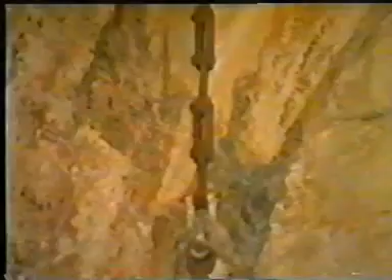In a discontinuous way, this was achieved by using metal balls. By rolling a counterweight along a curved track, continuous control was obtained.

In spite of these improvements, this development proved to be a dead end. More viable was the use of balance beams. This led to the bascule bridge with a counterweight in the balance frame.

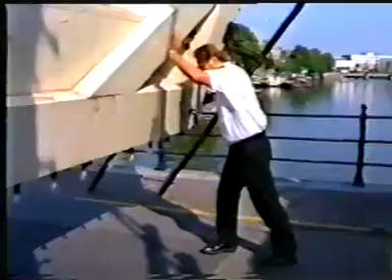Until about 1800, these bridges were constructed of timber. Afterwards, this material was steadily replaced by wrought iron and later by steel. Now, equilibrium can be maintained in each position, thus requiring a minimum of energy to move the bridge.

Integration of the balance frame in the deck gave birth to the bascule bridge. The ultimate situation is the same structure without counterweight.

A combination of a fixed and a movable bridge is the transporter bridge, very popular around the year 1900, but now out of date.

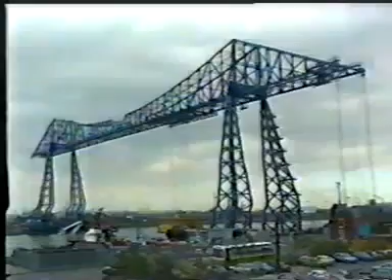Passengers and motor cars are transported by means of a carriage or gondola. Remotely related to this type of bridge is the rolling bridge.

This entire railway bridge is moved by means of rollers and cables.

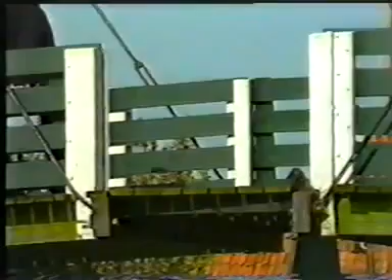In this cantilever drawbridge, not only the width of the vessel is important, but also the mast.

An old type of movable bridge is the derrick bridge, applied in fortifications and railway bridges. The main girders rotate with respect to vertical axes, placed in a saving in the abutment. This arrangement makes the opened bridge look like it's folded up.

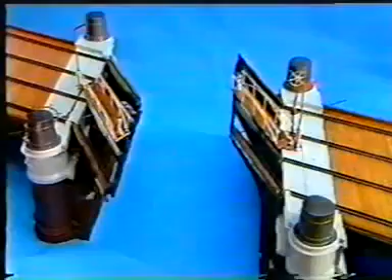A floating bridge is an alternative to make a passage. Here, pontoons fulfill the function of the bridge and support the deck. A system of cables pulls the pontoons under the approach spans to let the ships go through.

A next step in the direction of a swing bridge is this pontoon bridge.

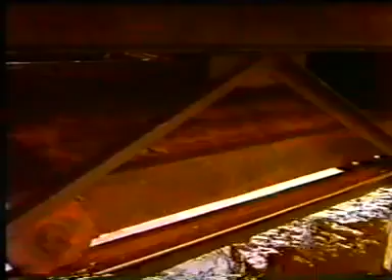A rigid bridge construction, supported by a submerged pontoon at the nose of the bridge, leads to the pontoon swing bridge. At the lower flange, a bogie, including counterweight, is moved in the direction of the point of rotation. The nose of the bridge is lifted from the supports.

The entirely submerged pontoon generates a constant upward pressure.

Another application of a pontoon can be found in a swing bridge with a rim bearing. The pressure on the rollers, due to dead load, is reduced to about 30% by a pontoon in the pier. In this way, friction is reduced, and consequently the energy necessary to move the bridge.

At the turn of this century, this system was used in some large swing bridges in England. To move the bridge, it has to be freed from the supports.

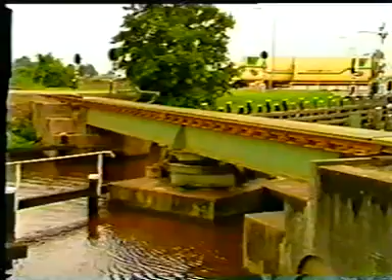A combination of drive and raising device is the tulp construction, an ingenious invention named after its designer. A pinion rotates a circular carriage by means of a toothed rack. The upper wheels pass along a coil-shaped track and lift the bridge and set it free from the supports.

The bridge does not yet rotate, as one roller of the crank prevents this movement. The moment the bridge is lifted sufficiently, the crank rotates.

The lower roller now follows the horizontal track. The other roller is supported by an inclined plane, which prevents the bridge from rolling back along the slope.

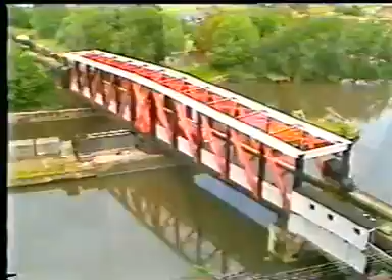In a symmetrical swing bridge, equilibrium is established naturally. However, this symmetry is a necessity in this aqueduct swing bridge. Symmetry, because changing water level and the possibility of leaks must also be taken into account.

To move this railway bridge, first a number of safety procedures are carried out. With a key system requiring a mandatory sequence, disconnection of the bridge from the signal system and rails is achieved.

In these two unusual asymmetric swing bridges, two counterweights keep the bridge in equilibrium. One counterweight in the lateral direction, the other in the longitudinal direction.

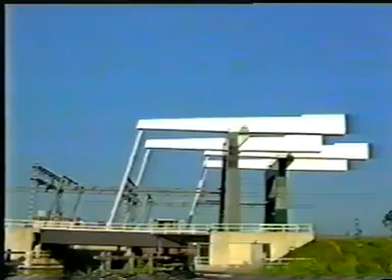Most types of movable bridges did not adequately meet developing requirements and have ceased to be used. Four types survived: the bascule bridge with overhead counterweight, the bascule bridge, the lift bridge, and the swing bridge. Movable bridges are constructed of steel and applied everywhere.

A bascule bridge with overhead counterweight. The structure consists of the movable deck, the tie rods, and the balance frame, including the counterweight.

The balance frame is supported, in this case, by a portal frame. In this railway bridge, the bracing between the balance beams is missing. Here, the balance frame is composed of two I-beams, including a bracing designed as a Vierendeel girder. This bracing is required to produce lateral stiffness against the wind and to prevent the lower flange from buckling.

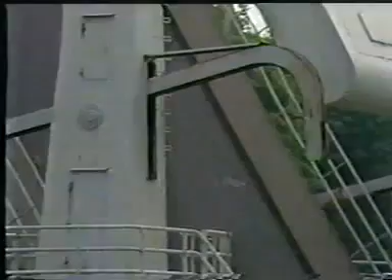A part of the operating mechanism is housed in the columns. It moves the curved rack, thus opening and closing the bridge.

In small bridges, the complete operating mechanism is housed in the columns. An electric motor drives the bridge via a gearbox, a system of shafts, and an open gear. In larger bridges, the drive is housed in a pit in which the motor, gearbox, and brake are placed.

In order to guarantee equilibrium in every position, it is necessary to locate the pin connections in the balance frame and the deck at the vertices of a parallelogram. As a second condition, the virtual lines between points B and E and C and F should be parallel. Here, E is the center of gravity of the whole balance frame, and F is the center of gravity of the deck.

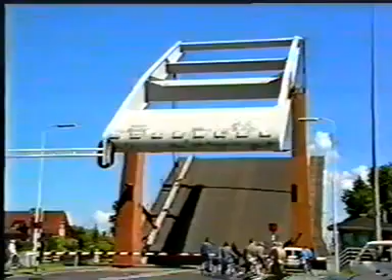In this case, the frame moves in between the columns. The point of rotation is situated immediately adjacent to the column. However, the point of rotation may also be situated above the column. This would limit the angle of opening of the bridge severely. For this reason, an offset column is used.

In bridges with an orthotropic deck, separate balance beams are used, and the bracing is missing. By separation of the balance beams, more counterweight can be installed. The beams are constructed like box girders. A box girder section possesses a large torsion constant and bending stiffness in two directions, making the structure less sensitive to vibrations.

Equilibrating the deck takes place by means of the counterweight. It may consist of concrete, a mixture of scrap and concrete, or cast iron, usually put up in a box. Or, in the case of a broad bridge, a solid block of cast iron at the back of the beam.

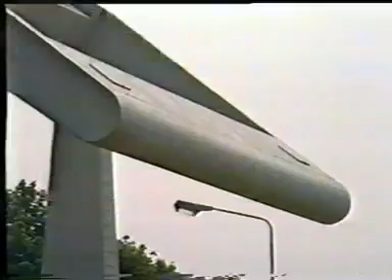In bridges with a timber deck, the counterweight is placed in a box girder. In this way, a rigid connection is created between the beams, ensuring that the bridge rises evenly. A one-sided drive becomes possible.

Correction of the counterweight may be necessary due to structural modifications made to the deck. Additional space for ballast blocks in the counterweight box is reserved and is accessible by hatches.

The tie rods connect the balance beams with the deck. Thus, vibrations caused by traffic load are transmitted to the balance frame. This is taken into account in the design of highway bridges. These vibrations can be reduced considerably by connecting the tie rods to the front cross girder at the level of the neutral axis of the main girder.

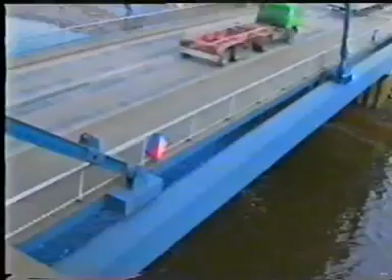Alternatively, the tie rod is connected to a lift beam adjacent to the deck, which is connected to the front and back cross girder by means of a hinge-like construction.

The deck of a modern bascule bridge with overhead counterweight is usually designed as an orthotropic deck. It is composed of a deck plate, stiffeners, and cross girders. A thin wearing surface is applied to the deck plate in order to reduce the dead load. This layer usually consists of a slurry covered with a layer of calcined bauxite, with a total thickness of about 8 millimeters.

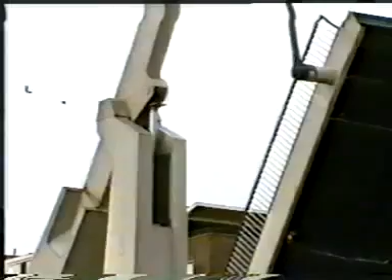Operation of the bridge is possible by means of a crank connecting rod mechanism, a hydraulic system, or by means of a rack: a steel bar passing through or along the side of the column. It is provided with teeth or pins and meshed with a pinion. The mesh is maintained by a guide frame.

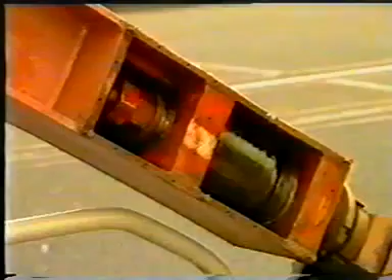The reaction at the front cross girder, due to dead load of the deck, is reduced to zero by the tie rods. To create a positive reaction on the supports, the rack contains a pre-stressed buffer. This buffer is compressed by making the pinion rotate a bit further, and the resulting compression is retained by the brake.

Given a constant speed of rotation of the pinion, the movement of the deck is decelerated in the neighborhood of the support due to the curvature of the rack. In the same way, the compression of the pre-stressed buffer is achieved.

As a consequence of developments in electronics, the speed of the pinion is adjustable and a straight rack can do the job. By using a motor with electronic speed control, a prescribed velocity time diagram can be followed exactly: brake loose, creep, accelerate, constant velocity.

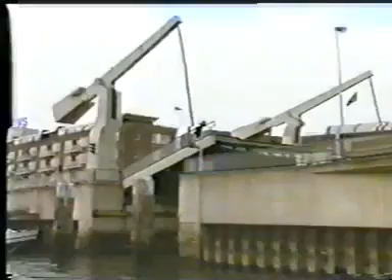This type of bascule bridge can also be opened and closed hydraulically. The speed is controlled by a variable delivery pump or a flow control valve.

A simple system may consist of a pump with or without variable delivery, a pressure relief valve to check the system pressure, a direction control valve, here in neutral position, a flow control valve to adjust the velocity of the bridge, a hydraulic cylinder, and a filter to remove abrasive and other types of contamination.

These parts are connected by pipework. In this situation, the deck is assumed to be overweight and the wind is not taken into account.

The direction control valve connects the pump and the cylinder. The piston rod moves and consequently the bridge starts to move. If the forces on the bridge become too large, the pressure in the pipework may become too high. The pressure relief valve starts working now to remove the excess pressure.

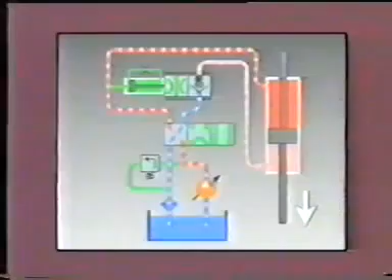In closing the bridge, the flow control valve is selected. Its operation is automatically controlled by the pressure distribution in the system. Because the action of the overweight of the bridge always works together with the action of the pump, the flow of oil tends to be greater. The flow control valve keeps the velocity of the piston under control, and so the velocity of the bridge.

Bascule bridges with overhead counterweight are usually considered where the waterway width does not exceed 25 meters. However, in exceptional cases, a waterway width of 50 meters is possible. The deck may be constructed as a straight or a skew deck.

If the bridge is built in an elevated situation, the counterweight may reach beneath the deck level. A parallelogram, a basic element of a bascule bridge with overhead counterweight, is recognizable in this complex steel structure.

With a fixed counterweight, equilibrium can be maintained in every position. This special type, the Strauss type, was developed in America. Many examples are to be found in the harbor of Antwerp.

The choice of a bascule bridge with overhead counterweight is mainly determined by the relatively low price because of the absence of a pit. Aesthetic considerations also play a part.

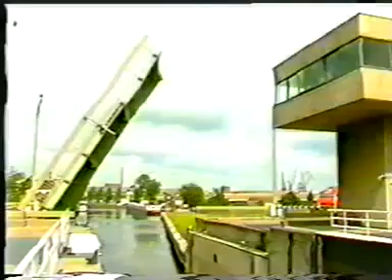If a wider clearance than about 25 meters is required, a bascule bridge is more advantageous. 60 meters or even more is possible for a single-leaf bascule bridge. Here, the total costs are severely affected by the presence of a pit.

A bascule bridge is in fact a bascule bridge with overhead counterweight, in which the balance frame is integrated in the tail of the bridge. The four hinges are replaced by one center of rotation. And to fix the bridge in the service position, it may be equipped with a raising device.

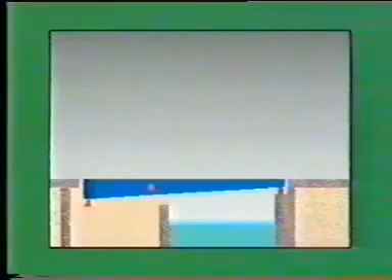In bascule bridges, with or without overhead counterweight and a timber deck, an extra bracing is applied for reasons of rigidity. In the opened position and without bracing, the dead load of the deck would cause a deformation of the cross girders with respect to the weak axis. An additional function of the bracing is to carry the horizontal braking forces when the bridge is open to traffic.

The section behind the point of rotation, the tail, moves in a pit or in free space. The bridge rotates with respect to a fixed point of rotation which coincides with the center of gravity.

For dead load, the bridge should be in equilibrium in every position. Therefore, the center of gravity of the steel structure, the point of rotation, and the point of action of the counterweight must be located in one line.

Also, in a Scherzer bascule bridge, the center of rotation coincides with the center of gravity. However, now the center of gravity is moved horizontally.

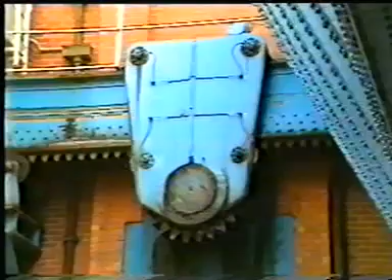The teeth on the quadrant track are necessary to fix the point of contact of the track and the quadrant.

A more advanced solution is the center stub. Good contact between the stubs and quadrant is achieved by giving the stubs an involute profile.

A bascule bridge with a fixed axis usually has a closed pit. The tail of the bridge is hidden from view by the road construction, which also forms the ceiling of the pit.

In an open pit, the traffic runs across the tail of the bridge. A disadvantage of this solution is that while opening, all dust and dirt on the deck falls into the pit. This is why this type of bridge is not preferred.

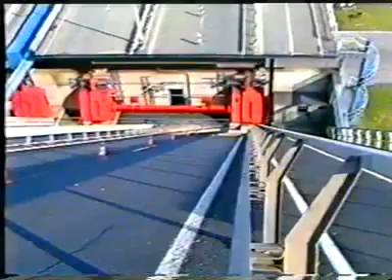In the movable condition, the bascule bridge is supported by two trunnions, each with a spherical roller bearing or a spherical plane bearing, made in an extremely precise production process.

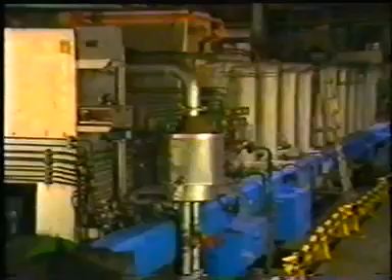Turning, grinding, hardening, and tempering. And then a fine machine finish.

In spherical roller bearings, the rollers in the outer ring have common spherical track.

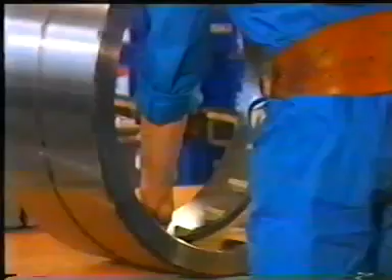The two tracks of the inner ring are each positioned at an angle with respect to the axis of the bearing.

Between the two rings, the spherical rollers are placed in a cage which has a high resistance to abrasion. The bearings are self-aligning and are therefore insensitive to deflection of the trunnion.

Mounting the various components together is carried out with utmost care. The smallest plastic deformation will have an adverse effect on the lifetime. By applying roughness tolerances within very close ranges, a minimum internal friction can be achieved.

Finally, the radial clearance is checked to ensure that it is within the acceptable tolerance range.

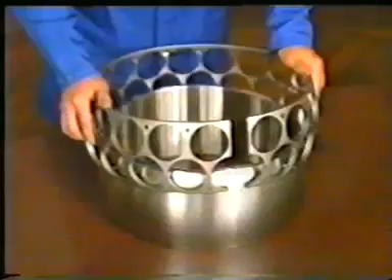A new development is the spherical plain bearing, in which discs of polyamide reinforced with glass fiber are used.

Size for size, these spherical plain bearings can carry greater loadings, leading to smaller dimensions. They are resistant to vibrations and micro displacements, such as may be met in bridges.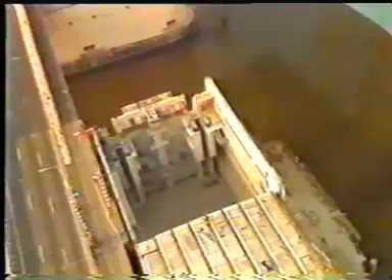To ensure enough room for the main girder of the bascule bridge to rotate over an angle of about 80 degrees, the bearings are placed on brackets in the pit.

While rotating, the stress distribution in the bridge changes continuously. The double symmetric point of rotation of this bridge will be used as an example. The stress distribution is calculated for dead load, for rotation from the closed, movable position up to the opened position.

The colors indicate the equivalent stresses within a certain interval. Violet, a high stress in the interval between 105 and 120. Light blue, a low stress between 0 and 15 newtons per square millimeter.

In the closed, movable position, the stress distribution is symmetrical, with high stresses in the upper and lower flange and low stresses in the neighborhood of the trunnion bore. The stiffeners reduce the stress locally.

During rotation, the bending moment and shear force diminish and the axial force develops. At an angle of opening of about 50 degrees, this effect can be observed clearly, as symmetry in the stress distribution is lost.

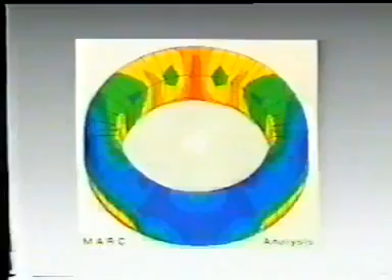Again, the symmetry is to be noted. The area of contact of the trunnion bore and trunnion can be easily spotted.

Due to hole deduction at the point of rotation, the web of the main girder is locally made thicker. To resist wind loading in the opened position and to guarantee stability, stiffeners are necessary.

Stiffeners 50 millimeters thick are welded to the web, which is 70 millimeters thick.

Research at TNO has shown that using steel with low carbon equivalent, especially a low carbon percentage, combined with the use of vacuum-packed consumables with very low moisture content, makes preheating unnecessary. This means an improvement in quality and an increase in productivity.

A local change in direction in the upper flange near the transition from tail to deck causes a concentrated load perpendicular to the flange. This transition should take place smoothly.

A stability problem arises in the compressed lower flange near the point of rotation, in particular in service conditions. This can be taken care of by supporting the lower flange laterally.

Counterweight material, usually concrete, is used, often housed in a steel box. By using a hinged counterweight, the lever and the point of action of the counterweight are fixed exactly.

In this case, a deeper pit is required.

In all types of bascule bridges, a rack can be used to operate the bridge. Also in this case, a guide frame keeps the pinion and rack in mesh.

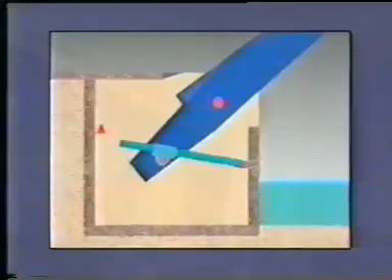The same movement is achieved if we make the pinion move along a curved pin rack.

In the operating machines of this bridge, a toothed rack is used. The end of the rack may consist of a shell construction, which produces a smooth deceleration during lowering of the bridge, and next raising.

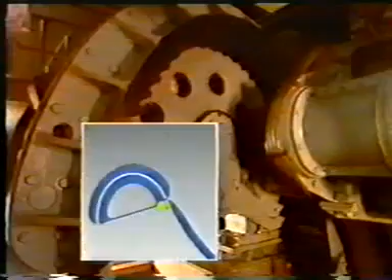While the electrically driven pinion maintains a constant speed, the curvature changes at the place where the pinion leaves the rack and moves on to the shell. The shell rotates and the curvature increases.

This reduces the speed of the bridge. Over the last part of the shell, the curvature is constant and consequently the speed is reduced to 0.

This part of the shell is used to raise the tail of the bridge, achieving a positive reaction at the nose of the bridge.

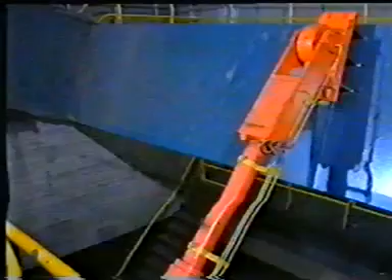The Panama wheel was originally developed by Gustave Eiffel to operate the lock doors of the Panama Canal. It consists of a circular sector with a pull-push rod connected with hinges to the sector and the bridge.

During closing of the bridge, deceleration takes place automatically because the speed of the hinge in the direction of the pull-push rod reduces to 0.

In this pull-push rod, a pre-stressed buffer is used, making it possible to create a positive reaction in the closed position of the bridge.

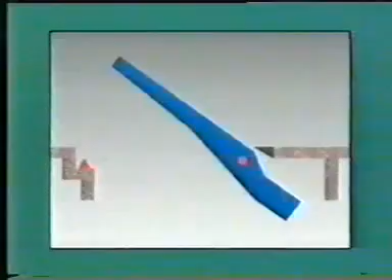This system has one disadvantage. Due to a temperature gradient, a curvature in the deck may arise.

This means that the support of the bridge is reached at too high a speed because deceleration takes place over too short a distance.

With an electronically operated drive, this disadvantage can be avoided. The ideal velocity to approach the support is about 3 centimeters per second.

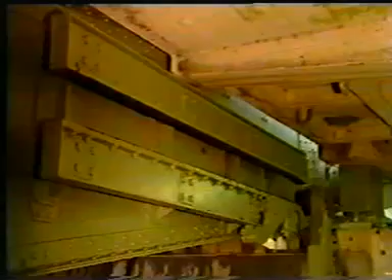An alternative for a Panama wheel is the roller slot system. A rotating crank at the end, provided with a roller, acts in a slot and moves the bridge.

The same system is also possible with a hydraulic drive. Similarly, as in a Panama wheel construction, it may happen that the bridge touches the support with too high a speed due to a temperature gradient.

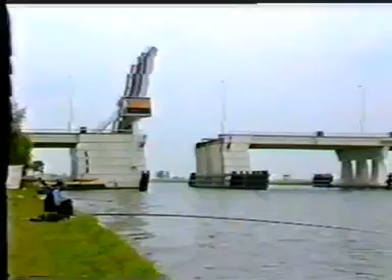The next step in the development is a direct operation of a bridge by means of a hydraulic system. The high forces which can then be achieved make it possible to deviate from strict equilibrium as a design option.

Obviously, an overweight of the deck causes a positive reaction at the nose support. If no overweight is present, the bridge must be lifted at the other end. The movable bridge is transformed into a fixed bridge by means of a raising device, making the bridge less sensitive with respect to vibrations.

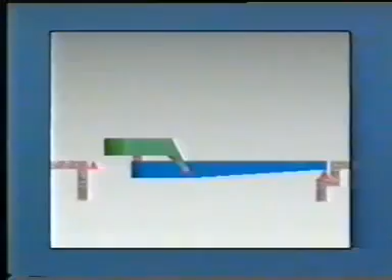In this bridge, the counterweight is housed in a construction supported on the axis of rotation and the tail of the bridge. At the end of the closing maneuver, a hinged column is moved under the counterweight, which is then carried by the column and the axis of rotation.

The movable bridge now behaves like a fixed bridge. This principle is in common use, especially in railway bridges.

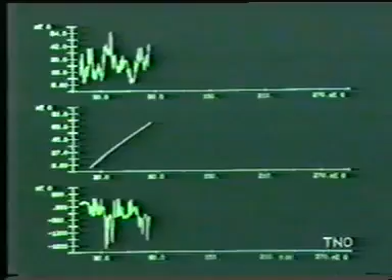Bridges are loaded by fluctuating wind loading during opening, as is shown in the upper graph. Assuming a speed-controlled motor, which produces loading as shown in the center, this results in loading on the drive, which is superimposed on the dynamic loading due to moving the bridge.

The lower graph shows the result of such a simulation. With rigidity, buffers, masses, and dampers as parameters, and a random wind loading, the instantaneous motor torque is calculated.

In very windy areas, reduction of wind loading can be achieved by constructing the deck as a grid. Wind loading is a factor not to be underestimated, also in other types of movable bridges.

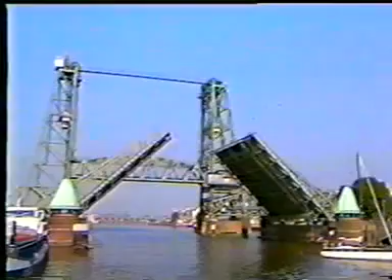Single-leaf bascule bridges are possible as well as double-leaf bridges. In this way, a greater waterway width can be obtained. An unrestricted air draft can be achieved with a bascule bridge. In a lift bridge, a greater waterway width is possible, but the air draft is limited.

The main parts of a lift bridge are the towers, made of concrete or steel, and the deck in between the towers. Counterweights are placed in the towers or outside the towers. The deck is connected to the counterweights by means of counterweight cables.

Starting with a design option in which equilibrium between deck and counterweights is obtained at half height, this equilibrium is disturbed when the bridge is moved. The cable length to the left or to the right of the sheave is shortened or lengthened, shifting the action of the cable weight to the right or to the left.

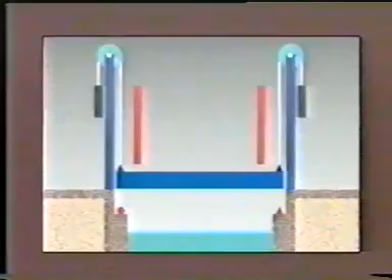A disturbance in equilibrium induces acceleration. To counteract this effect, a balance chain is installed, outside the tower or inside the tower.

Dead load equilibrium is now maintained in every position of the deck. However, a positive reaction of the support in closed position is no longer guaranteed.

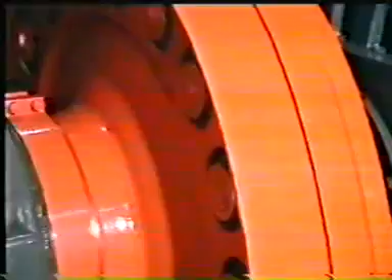The wind is the disturbing factor, which can be accounted for by friction between the counterweight cables and the sheaves. The positive reaction is generated by exerting an extra torque on the sheaves by an elastic coupling, fixed by the brake. This reduces the stress in the cables between sheaves and deck.

Another design option might be to add some extra weight to the deck to guarantee the downward motion of the bridge and a positive reaction. The bridge is moved by a separate system of cables, which pulls the counterweight downwards.

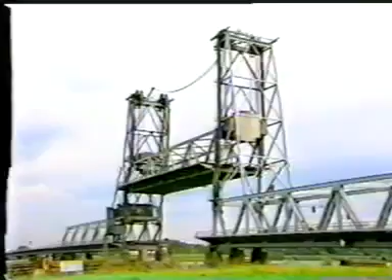If approach spans are present, the towers may be placed on these spans or be founded separately. Where the towers are supported by these approach spans, the temperature gradient should be accounted for, as deformations due to this temperature gradient will arise.

The tower tops move toward one another and the deck may stick. To prevent this, care should be taken to provide for sufficient clearance between deck and towers. The deck is fitted with guide rollers, rolling up and down the faces of the towers.

The counterweights can be made of steel. Concrete is a factor of 3 lighter than steel and needs a greater volume to obtain the same counterweight. The cables are connected directly to the counterweight, or by an equalizer distributing the same load to each cable.

Cables are distinguished by their method of manufacture: Lang's lay cables, called after the Englishman Lang, and normal lay cables.

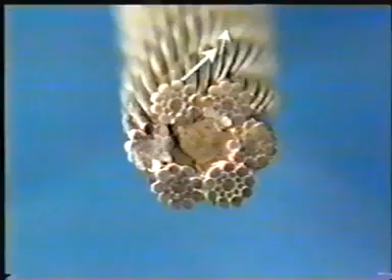In Lang's lay cables, the wires in the strands and the strands themselves are wound in the same direction, both to the left or both to the right. However, in normal lay cables, the wires and the strands are wound in opposite directions, for instance wires to the left and strands to the right. The flexibility of a Lang's lay cable is greater than that of a normal lay cable. This is why Lang's lay cables are used in lift bridges.

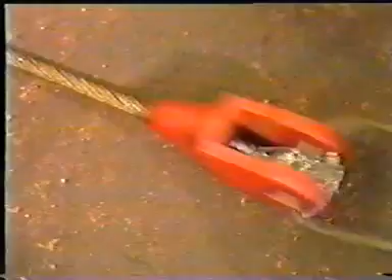The cable end connection consists of a socket filled with a special resin. The strength is more than sufficient. Tensile tests show the rupture always to occur outside the socket. After fabrication, the cables are stressed for 36 hours up to one third of the ultimate load. This is how the major part of the structural strain is removed.

When the stress is removed, the cable will slightly unwind. In order to mount the cable with the correct length, one side is painted to show one line. If, after mounting, this painted line runs parallel to the cable axis, the cable has the same length as measured while stressed.

If the bridge is open to traffic, the deck must be fixed vertically and brought in the correct position in the longitudinal and lateral directions. By means of overweight of the deck or a locking pin, the vertical position can be fixed. A pin necessary for centering in longitudinal and lateral direction also adjusts the rails. Buffers reduce the kinetic energy just before the bridge touches the supports. The locking pin fixes the bridge vertically.

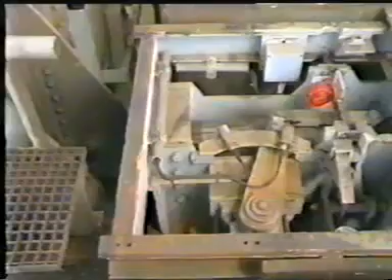Without precautions, the deck of a lift bridge might adopt a slanted position while moving. Synchronization, leading to a horizontal movement up as well as down, can be achieved by using a special cable system. In this situation, it is impossible for the bridge to rotate clockwise. A second cable prevents the deck from rotating anti-clockwise. So the deck has to move horizontally.

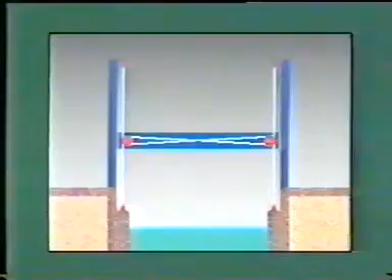Another system, the mechanical axis, requires a connection between the towers. A steel shaft between the towers enforces synchronization, as the differences in level are limited by torsion in the shaft.

An electrical connection can be produced by using induction motors. A rotor is moved by a rotating magnetic field, inducing an alternating potential in the rotor windings. Difference in phase means difference in potential. Connecting the corresponding rotor windings removes this difference in potential and so difference in phase. The motors are forced to keep in phase and synchronization is guaranteed.

Synchronization is easily achieved in direct current motors. A tachometer measures the speed of rotation of the motor. In this model, a difference in angle is introduced, shown by the difference in time at which the arrows pass point zero. Difference in angle leads to difference in potential and then to correction.

Distance between the motors is of no importance.

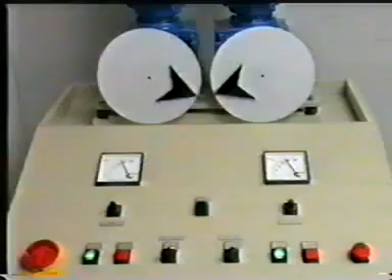A roll-on, roll-off bridge can also be considered as a lift bridge, though adaptation of the bridge and the operating mechanism is necessary. The bridge is supported by a vessel leading to a specific problem, tilt. This is the change in rotation of the ship during embarkation. It would cause torsion in the bridge. Moreover, the trim of the ship changes as well as the level, as the ship is subject to tidal movements.

The change in rotation is accounted for by making hinged connections between main girders and cross girders. The ramp plates between bridge and ship give adaptation to the shape of the ship and also partially to the tilt. Tilt, trim, and tidal movements should be accounted for in the operating mechanism.

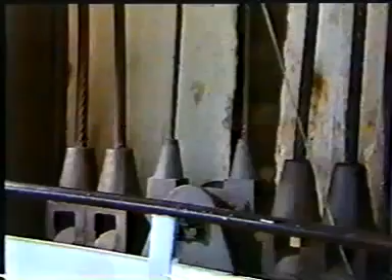Again, the bridge is kept in equilibrium by counterweight cables between bridge and counterweight. In the operating cables, a loop is introduced, including a relatively small counterweight, the cable tensioner. In this way, clearance is created. The bridge can follow the displacements of the ship without effect on the motors, because the cable tensioner and the clearance produce a constant tension in the cable.

When the cable tensioner is lifted and the clearance between support and tensioner is exhausted, the operating cables become effective to move the bridge.

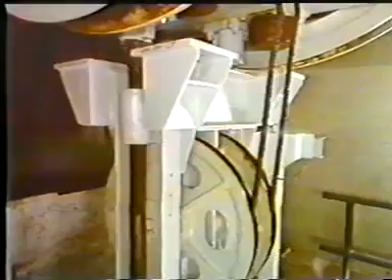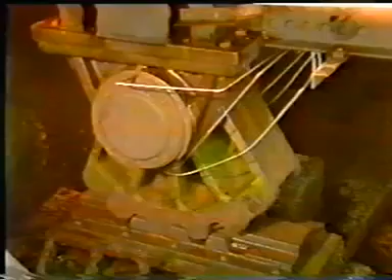During the movement, the cables between the deck and the counterweight remain vertical because the lift girder is guided vertically at the towers. That is why, at the abutment, a toothed roller support is installed which allows horizontal displacements due to the vertical guidance and the temperature expansion.

For a lift bridge, the width of the deck is of no importance. A lift bridge with only two towers was the optimal solution in this situation, with limited air draft and a wide central verge with two wide carriageways.

In a swing bridge, the width of the bridge should always be smaller than the length in order to achieve sufficient clearance. There is no limit to the air draft. The bridge width determines the diameter of the pier, but pier or bridge width reduce the waterway width.

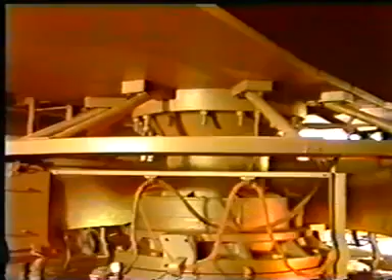A swing bridge consists of a steel structure with 2 equal or unequal leaves, supported on 1 point of rotation, a drive, and the end supports, including a raising device. Counterweight is only necessary in asymmetrical bridges. A swing bridge is protected by fenders, as the bridge in opened position and the pier are vulnerable to collisions.

A plate girder as main girder can be chosen, or a simple cable-stayed girder. A modern cable-stayed swing bridge, and a truss.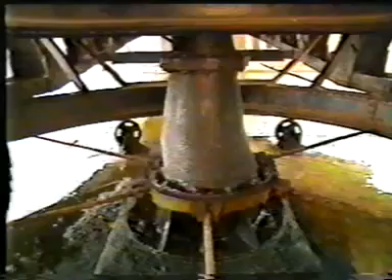The swing bridge is supported either by a rim bearing or on 1 point of rotation. The point of rotation coincides with the center of gravity. As in this situation, the bridge is exposed to wind effects, 3 or more balance wheels are used, which limit the tilt of the bridge in the movable position.

A rim bearing changes the swing bridge in service condition into a girder on 4 supports, of which the central span is relatively small. Loading on one leaf introduces an upward deflection of the other leaf, and the reaction on one support on the pier may reduce to 0.

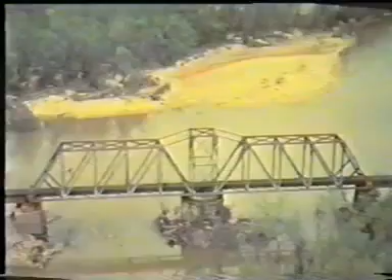To prevent this, the central part is equipped with a light truss system, which allows shear deformation to occur. In this way, the bridge rests on all supports, even if unequal loading is applied. Still better, however no longer in use, this force distribution can be obtained by a pull rod with slot as a connection between bridge parts and tower.

As the roller track of the inner circle is shorter than the track of the outer circle, the rollers are tapered. Due to sensitivity with respect to tolerances, deformations and subsidence it may happen that not all rollers are load carrying.

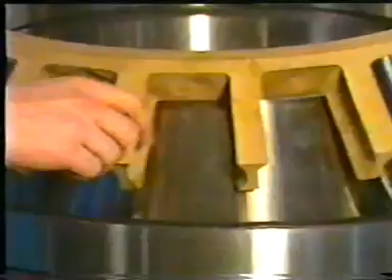This disadvantage is removed in modern constructions by replacing the rim bearing by a spherical roller thrust bearing. It consists of an inner and an outer ring in which a carefully machined cage is fitted. In that cage, the spherical rollers can rotate. This bearing type is self-aligning, which makes it insensitive to angular misalignment of the axis to the housing.

The spherical roller bearing is a part of the total rotation point construction and can only transmit radial and axial forces. Another type is the slewing ring bearing. The inner and outer ring are provided with a pattern of holes so that they can be connected directly to the bridge and the foundation. On one of the rings, teeth are provided, by which the rotational movement can be obtained.

If a small rotation with respect to the horizontal axis is allowed, and with the center of gravity just outside the point of rotation, a raising device can be applied on one side. As the supports are removed, the bridge will slant and the centering comes free. The other side will come free from the supports at the same time.

Or the control is operated by the bridge itself by means of proximity sensors. These sensors are activated and the motor reacts.

Remote operation is possible thanks to the developments in electronics. Simply, with direct visual control, or from one bridge master cabin, two bridges can be attended to.